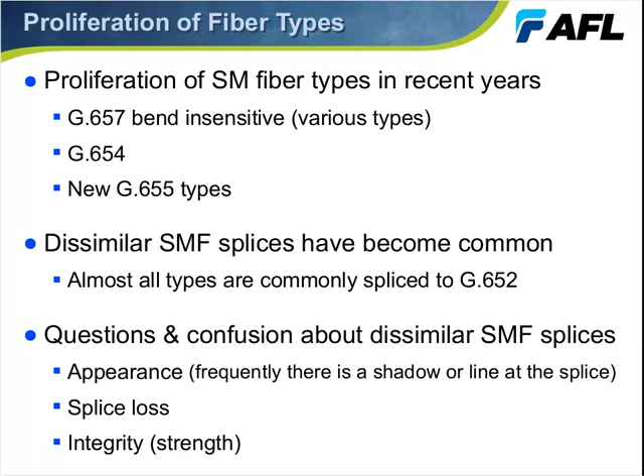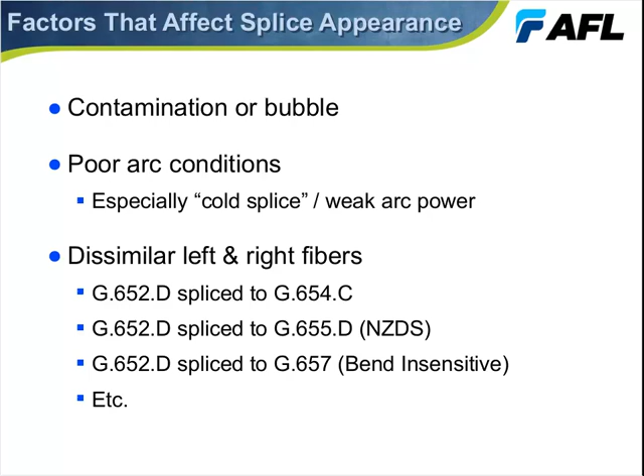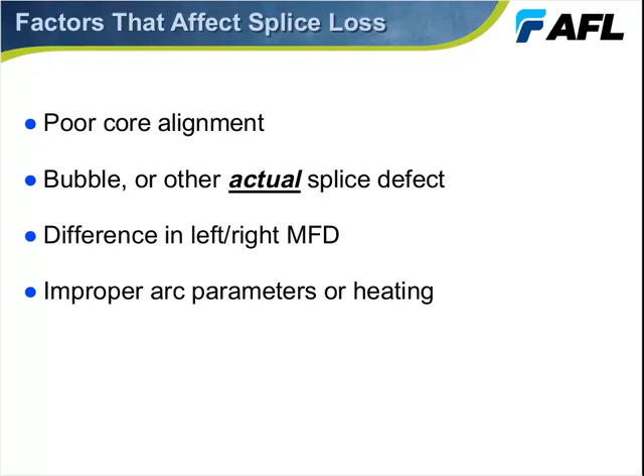The other thing is if we're splicing dissimilar fibers, there could be a difference in the MFD between the right and left fibers, and that will have some effect on the splice loss, although in the case of dissimilar single-mode fiber splicing, it's typically moderate. If the splicer itself has not been maintained as well as we might hope, then the arc conditions might not be what we want, and we might not be heating the fiber the right amount, and that can affect splicing in quite a number of ways, not all of which we'll discuss today.

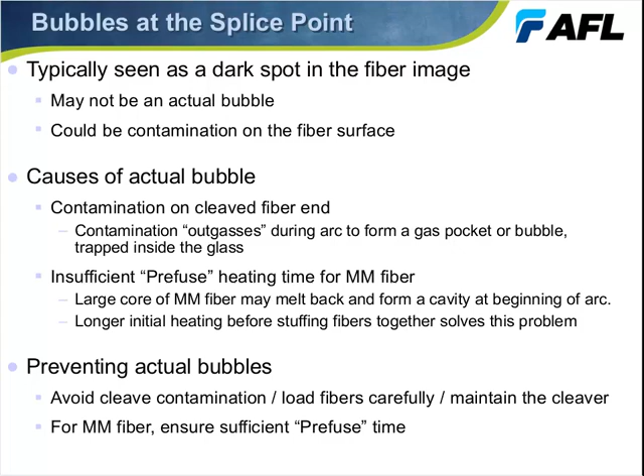So preventing actual bubbles, we want to avoid cleave contamination, load the fibers carefully, maintain the performance of the cleaver to make sure we're not inducing a problem. And then, of course, in the case of multimode fiber, make sure that we have the proper prefuse time to heat the fiber sufficiently.

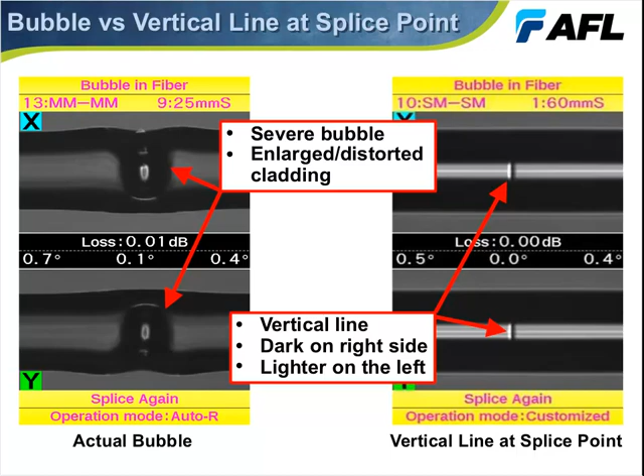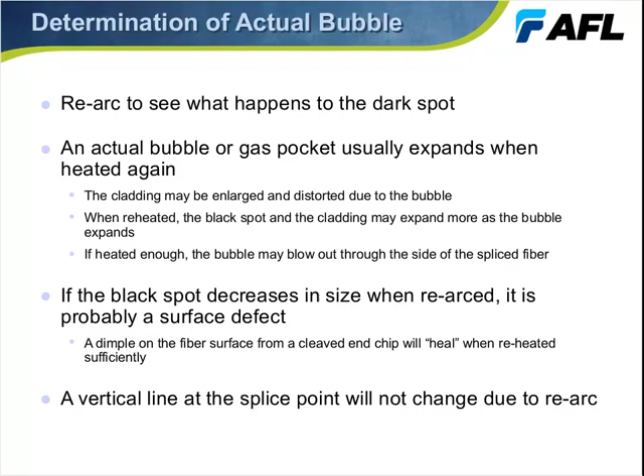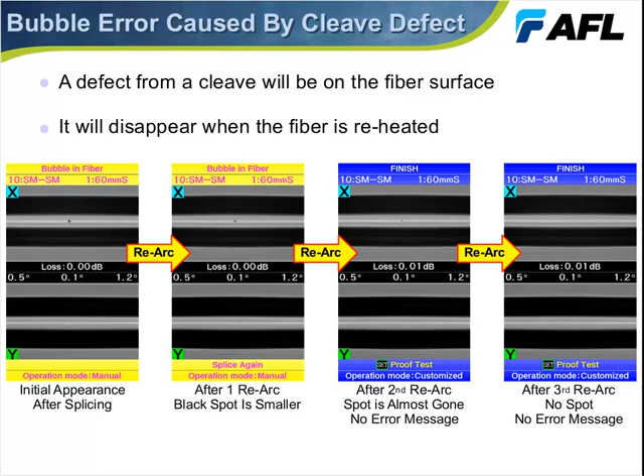After we re-arc another time, the bubble alarm is now eliminated. There's still a very small spot, but it's below the alarm limit threshold. And when we re-arc one more time, in this particular case, the spot is no longer visible. So in this case, it was not an actual bubble. It was some small defect or some dust on the outside of the fiber. And so this can be caused in some cases by just having a little bit of a large score mark from the cleaver. So this would be an example of something that's really inconsequential and unimportant.

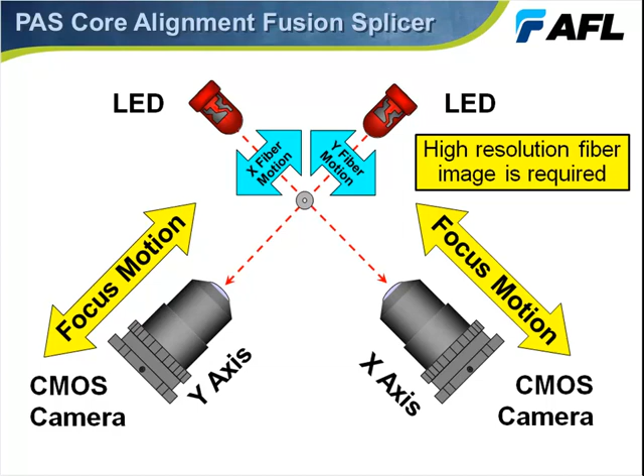So let's move to the next slide, and let's consider a single axis to explain how the optical system works a little better. And Connie, if you'll click, now we can see the backlighted fiber as the light goes through the fiber. It's bending. The light is collimated, but when it hits the air-glass interface at the outside of the cladding of the fiber, it sort of fans inward. And the reason that's happening is the index of refraction of air is lower than that of glass. So it's kind of like looking into a pond.

When you look into the pond, things under the water are not exactly where you think they are because the light is bending. And the same thing is happening here. And the amount that the light bends is due to the difference in the index of refraction between air and glass and also the incident angle.

So that's why the light rays that hit towards the outside of the fiber bend inwards more than the ones that are close to the center. And that's why the light is all kind of fanning inwards towards the center of the fiber. And the same thing happens at the interface of the core and the cladding, and this is a typical simple G.652 single mode fiber, so the core is going to have a higher index of refraction than the pure silica cladding because it's doped with germanium.

And as I mentioned, the focus position is very important. And if we go to the next slide, you see a little bit better graphical representation of everything that I've mentioned. You can see the collimated light coming in, the light bending inwards at the cladding surface, and then bending inward again at the core. The position of the focal plane is very important in order to get a good bright streak down the center of the bright region so we can properly align the core.

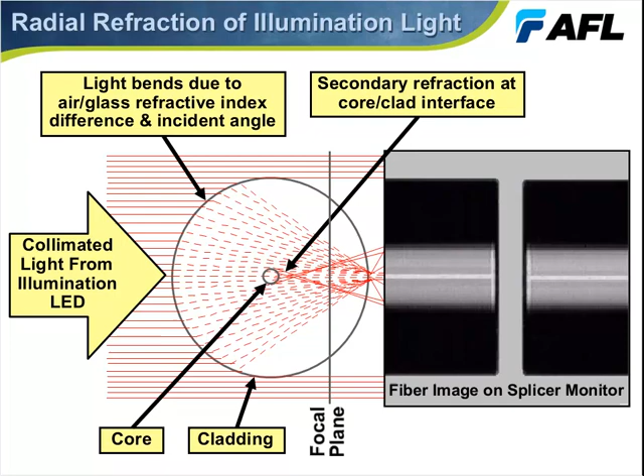Now, if we consider what the splicer is doing, it's using scan lines in order to image the data. So if we imagine a scan line from the top of the camera image to the bottom, when we go to the next slide, we see a representation of that scan line. So the background brightness from the LED, you can see that has been highlighted towards the right-hand side of this graphical representation. So that's just the brightness output of the LED. And then it's very dark, as indicated, in the outside areas of the fiber image.

And then where the light has been concentrated inwards, which is the area that's circled with the red dotted line, that's where we can see a very high peak in the brightness profile, and that allows us to tell the position of the core relative to the outside of the black region, which tells us the cladding diameter.

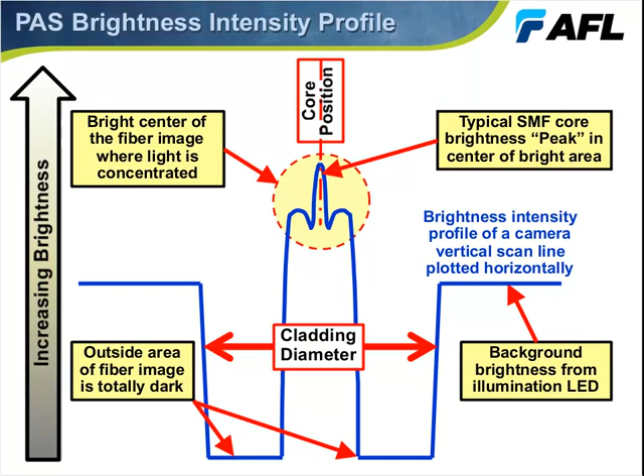So to understand a little better what's going on today, let's move on to the next slide, and let's differentiate between radial refraction and lateral refraction. So we're using the radial refraction and a very careful focus position to find the position of the core. But when we splice two different fibers together, we have to not only think about the difference of index of refraction due to the core versus cladding and air, but also the difference of the refractive index profiles of the left and right fiber.

So, as you can see in the radial refraction diagram, the light tends to bend inwards towards the area of higher index of refraction. It does that when it goes from air into the cladding, and it also bends inwards at the core cladding interface. So if we have a fiber on one side that has a higher index of refraction than the fiber on the other side, then the light bends in that direction. We can see this perhaps in a little more detail on the next slide.

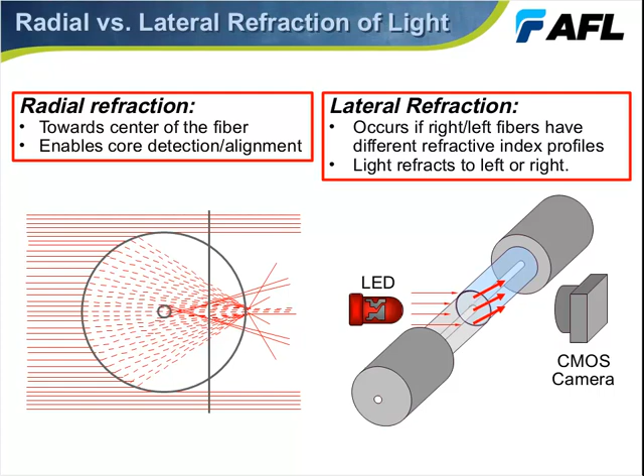And so in this case, we can see that if you look at the fiber image, there's a line at the splice point. It's a little brighter on the right-hand side and a little bit dark towards the left, which means that the light has bent towards the right-hand fiber.

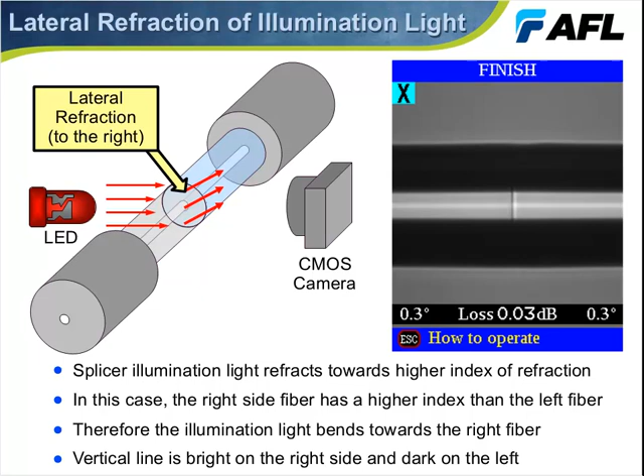So moving on to the next slide, we decided to choose some fibers for a case study. And if we go to the following slide, you'll see the fibers we chose. As kind of a control, we included in this study normal single-mode fibers spliced to normal single-mode. And then we chose a normal G652 to a 654, which is a fiber with a pure silica core. And then we did a 652 to a non-zero dispersion 655.

So moving on again to the next slide, one of the things we did is we measured the mode field diameter of all the fibers in our study. And we also wanted to look at the refractive index profiles, because that really has to do with why the light is bending the way it is. And we're very grateful for the help of Andrew Yablon at Interfiber Analysis for providing the refractive index measurements.

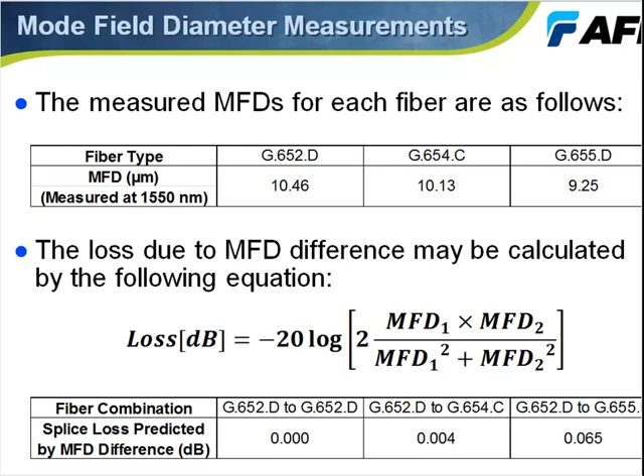And I won't discuss this too much, but essentially, when we heat the fiber, the refractive index changes a little bit. And the reason for that is when the fiber is created in the manufacturing process, when it's drawn, there are some residual stresses in the glass. When we heat the fiber, those stresses are relaxed, and so the refractive index changes slightly.

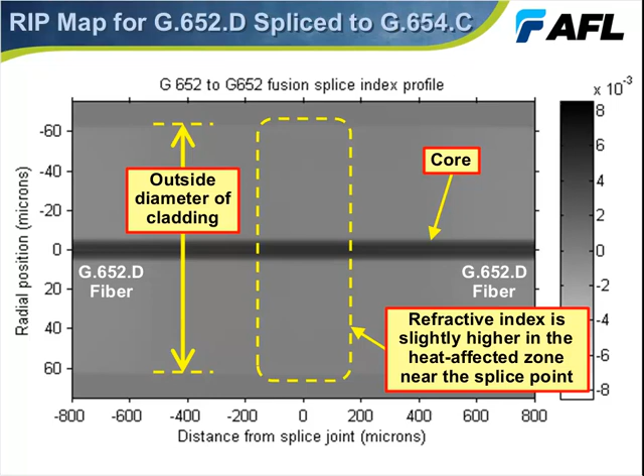Moving on to the next slide, you can see a left to right grayscale representation of the refractive index. The human eye can't detect it, but in the center of the splice point where the yellow dotted line is, the refractive index is a little bit higher than it is to the left and the right. And the reason is that's the area of the fiber that has been heated and relaxed, and therefore the refractive index changed.

Let's move on to the next slide, and let's look at the appearance of the splice. And at first, what I'm showing here is an oil immersion microscope image. So this is not an image from the splicer itself, but if you look, you can see a very small line in the center part there, which is the core. The cladding is almost the full width of the image, but where the cores of the two fibers come together, you can see a very slight line. But it's very, very hard to detect because this is just SMF spliced to SMF.

And Connie, if you mouse click, here we can see the image from the splicer itself. And again, there's not much we can see. It almost looks like a continuous fiber that has never been spliced, which of course is what we want it to look like, because that means it's a good quality splice.

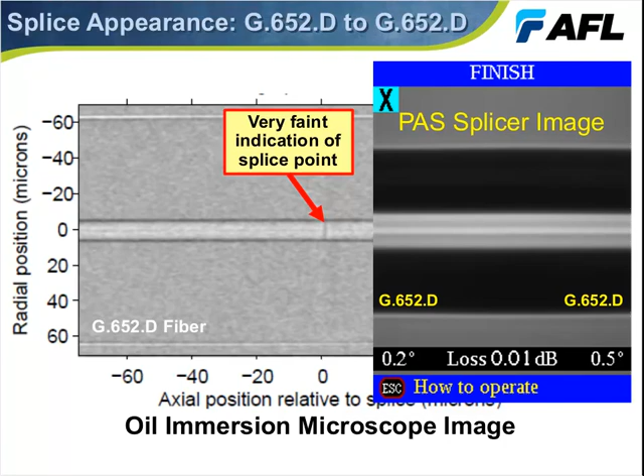Now let's look at the refractive index profile on the next slide of the G652 standard fiber as compared to the 654. And we've overlaid the refractive index profile of both fibers on the same graph, and we actually had to increase the vertical area that we're showing in the refractive index.

And the reason for that is in the G652 fiber, the cladding is pure silica, but on the G654 fiber, the core is pure silica, and the refractive index of the cladding has been doped probably with fluorine to reduce its refractive index relative to the pure silica core. So overall, the refractive index profiles look very similar, but the entire refractive index profile of the G654 fiber is lower than that of the standard G652.

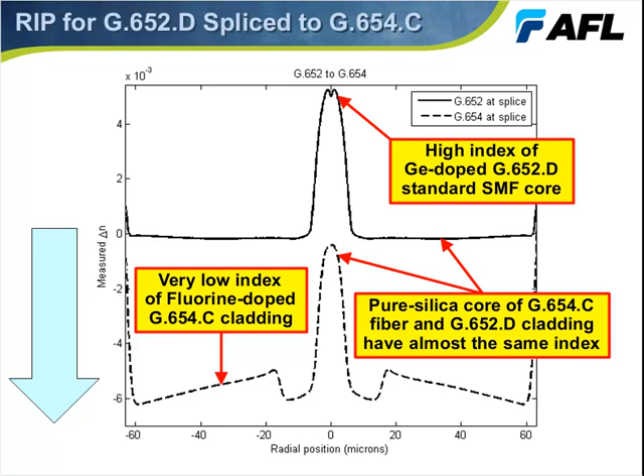So let's go on to the next slide and see if we show a graphical representation, again showing the 652 fiber on the left, the 654 fiber on the right. It's a little hard to see with the human eye, but in this grayscale, darker means higher index of refraction, and so the pure silica cladding of the 652 fiber is about the same refractive index of the core of the 654.

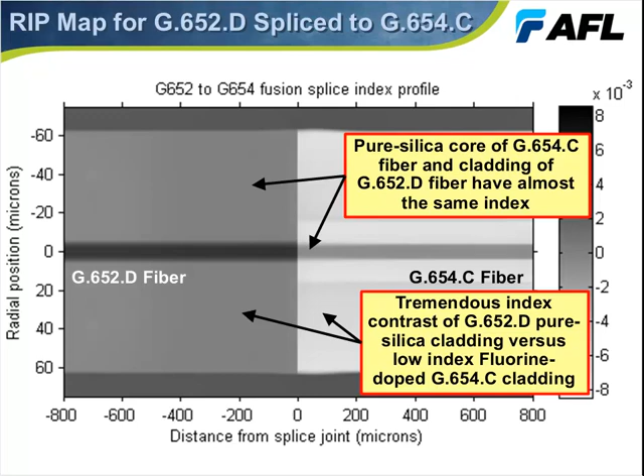Let's move on to the next slide, and here we see once again the oil immersion microscope image. And in this microscope image, there is a vertical line at the splice point, and it's dark on the right side and light on the left side. And remember what I said before, the light wants to bend towards the higher index of refraction.

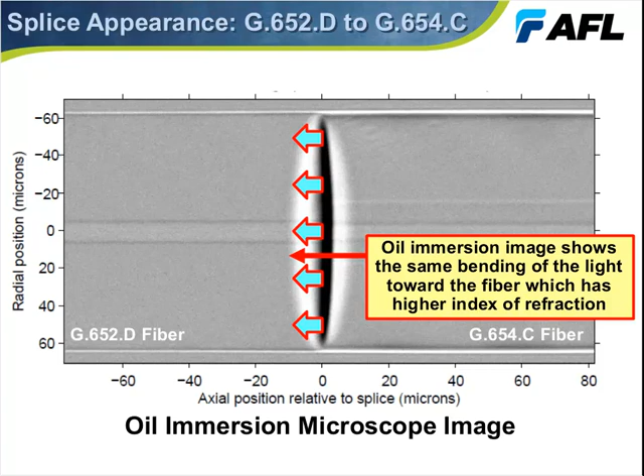So since the G654 fiber has a lower index of refraction across its entire refractive index profile, the light where the two fibers come together is dramatically bending towards the standard single-mode fiber. And Connie, if you mouse click one more time, we see exactly the same effect in the image on the splicer, and it's quite dramatic. It's quite dark on the 654 fiber side, quite light on the 652 fiber side.

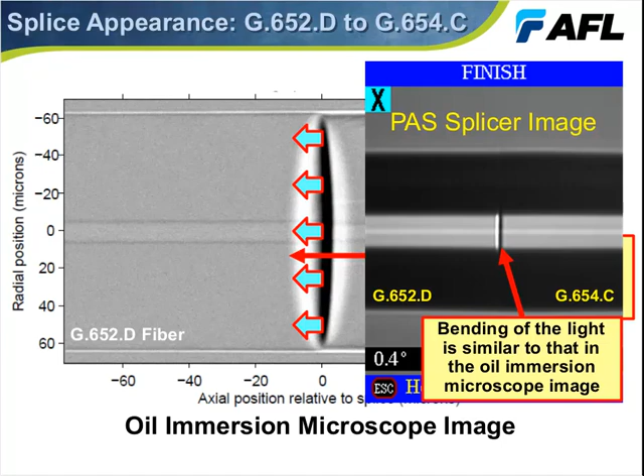So let's move to the refractive index profile of our last fiber combination. And it's a little difficult to make out the dotted line refractive index profile of the standard single mode fiber versus the solid line of the 655 non-zero dispersion fiber. But you'll notice a couple things. One is that the peak refractive index of the core of the 655 fiber is much higher than that of the single mode fiber, and also it has a couple of high refractive index areas outside of the core because there's a ring structure surrounding the core.

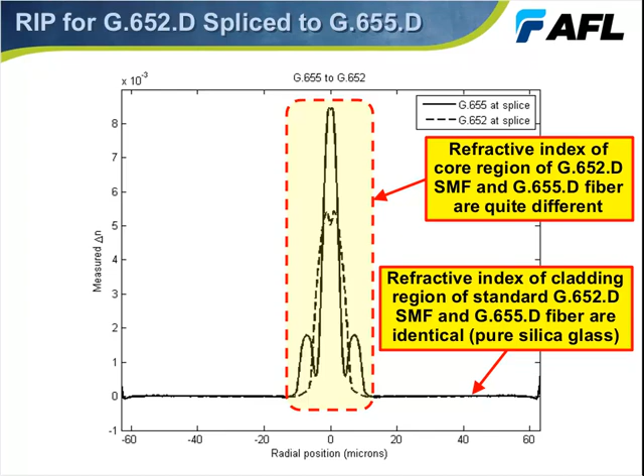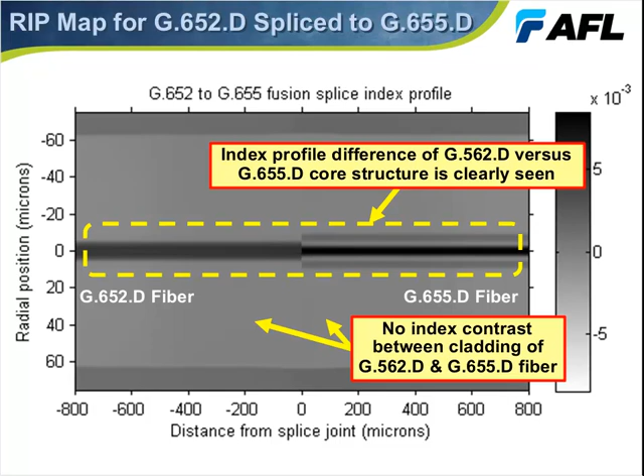Now, if we move on and show that graphically on the next slide as the map of the refractive index profile, once again we can clearly see the difference in the refractive index profile. We have a larger dark area on the 652 fiber for the core, a narrower, smaller area on the 655 fiber, which is darker, and then a shadow above and below that because of that ring structure.

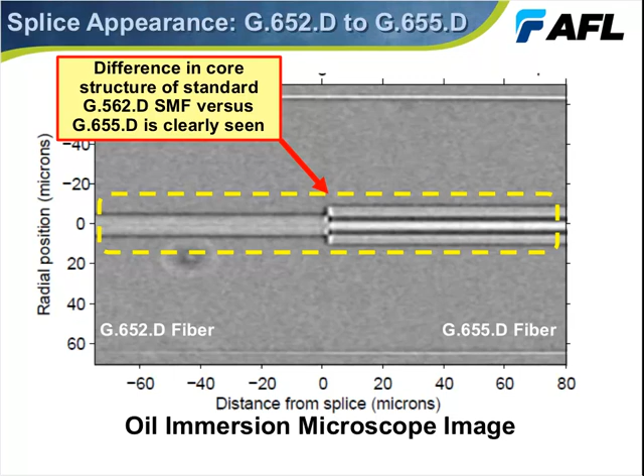And moving on to the next slide, you can see that we see something very, very similar in the oil immersion microscope image. And again, Connie, if you'll mouse click one more time. Once again, in the splice image, it's much more difficult to see it, but if you look very, very carefully on the 655 fiber, you can see that the brightness pattern in that bright central region is a little more complicated than it is on the 652 fiber.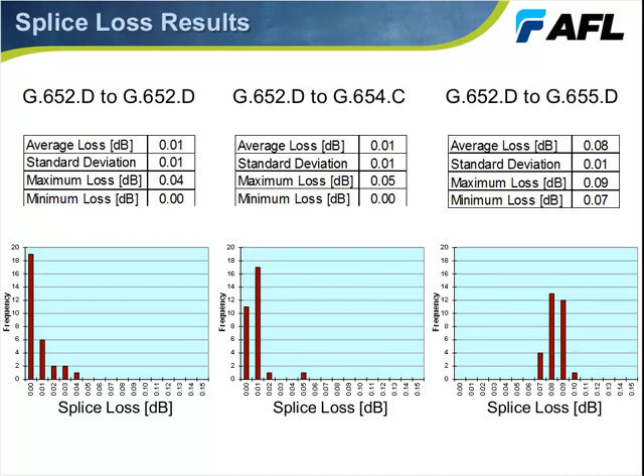Now on the 652 fiber spliced to the non-zero dispersion 655D fiber, we see that the splice loss results are nowhere near as good as the other two fiber combinations, and that's due to that large mode field diameter difference. So let's now go to the slide that shows the splice strength results, and this is the typical Weibull plot distribution where we use a log-log scale to show in the vertical axis the cumulative failure probability versus the strength on the horizontal axis.

And actually the strength results for all three of these fibers, those distributions look very similar. And so what we're seeing is that even though the refractive index profiles of these fibers are quite different, in terms of splice strength, it's meaningless. And so really what we're seeing from this is the appearance of this dark line, although it might intuitively be troublesome to the splice operator, it really doesn't indicate any problem with splice strength.

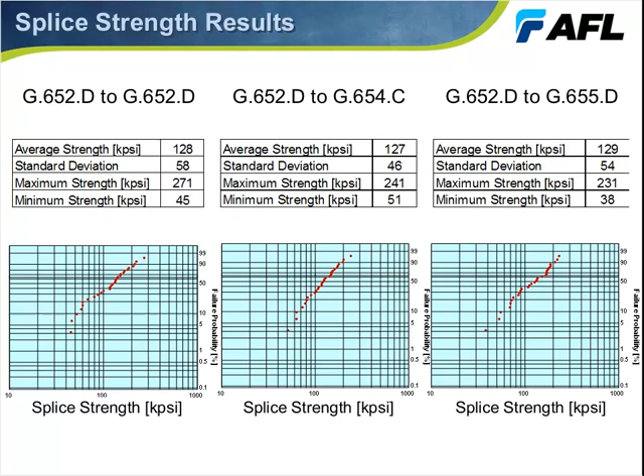So let's summarize the splice loss results on the following slide. And so we see a dramatic vertical line with the 652 to 654 fiber, but it has no effect on strength, and it really doesn't mean anything in terms of splice loss.

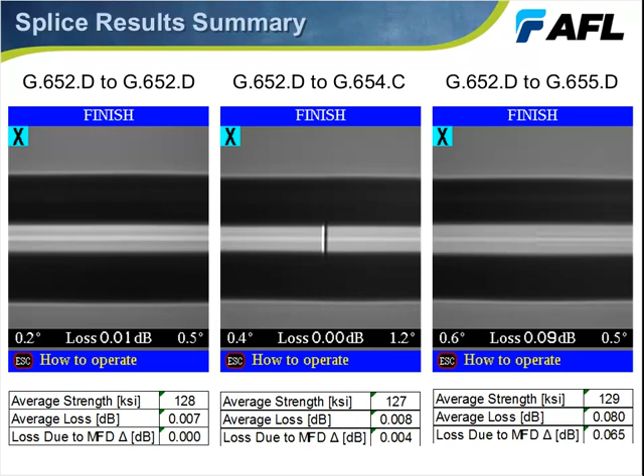Whereas with the right-hand image, where we're seeing the 652 fiber to the 655, even though that image looks almost as uniform left to right as the left-hand image of the standard single-mode splice to itself, frankly speaking, that fiber combination represents a higher average loss due to that mode field diameter difference. So let's move on to our conclusions.

So I think the first thing to understand is that a large refractive index difference between two fibers can easily result in a quite visible line, which to the untrained eye can be disturbing. But this line is due to the way the light is bending, and to a lateral bending of the light due to the differences between the two fibers.

And the larger the difference between the refractive index between the two fibers, the larger that vertical line is likely to be. So this is in effect due to the backlighting of the fiber, so that we can image it with our splicer camera, but it is not related to the transmission of light, optical power, or communication signals down the length of the fiber. So it's really not directly related to splice loss.

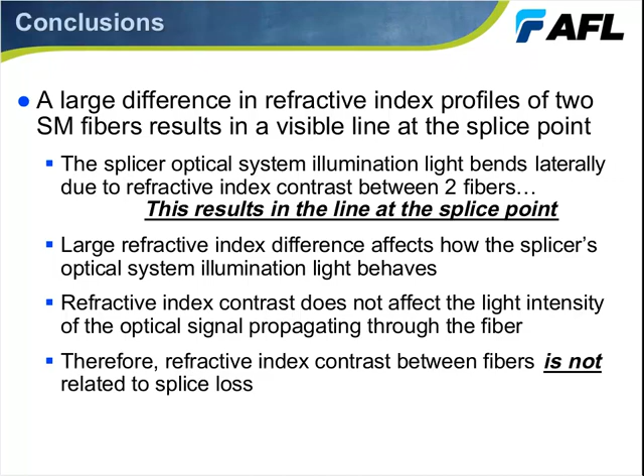And moving on to our final conclusions, a visible line in the splice point is not really a reliable indicator of any problem concerning splice loss or strength. And I think the three fiber combinations we chose were chosen to really illustrate that. So on the 652 fiber spliced to the 654 is a very prominent line. It's very visible, but the loss is very low.

Whereas with the 652 spliced to the 655, there's almost no visible line, but the splice loss is relatively high due to the MFD difference between those two fibers. So really we can't relate it to splice loss, and also there's no relation to splice strength.

On the other hand, if we know the mode field diameter difference between two fibers, that is a very good predictor of splice loss, as we've seen in this case, because that is actually related to the transmission or the coupling loss at the splice point.